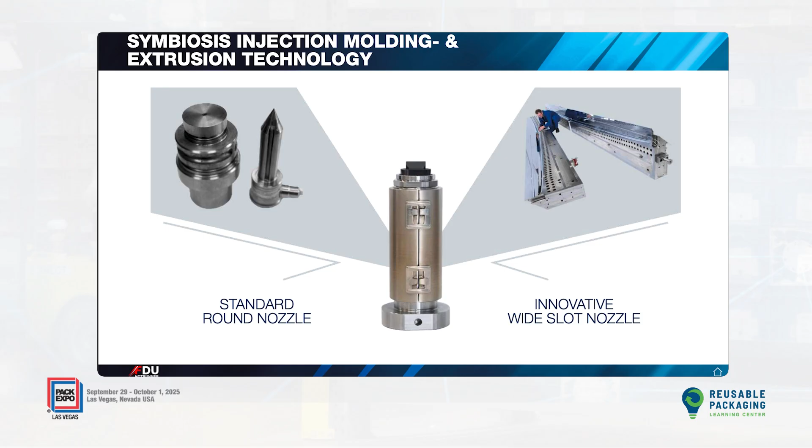Now, what you see here is a nozzle. The nozzle on the left-hand side is what it used to be. Here on this side, you see what we call extrusion. Extrusion is a different method of injection, which means it's how we make pipes or plastic bags. It's a non-stop plastic passing, like how you make a pipe or a hose.

With that die, we came up with the idea: instead of doing the film, why don't we do it for injection molding? And that's how we came up with the FDU, which is the nozzle you see in the middle. And that's what we're going to talk about.

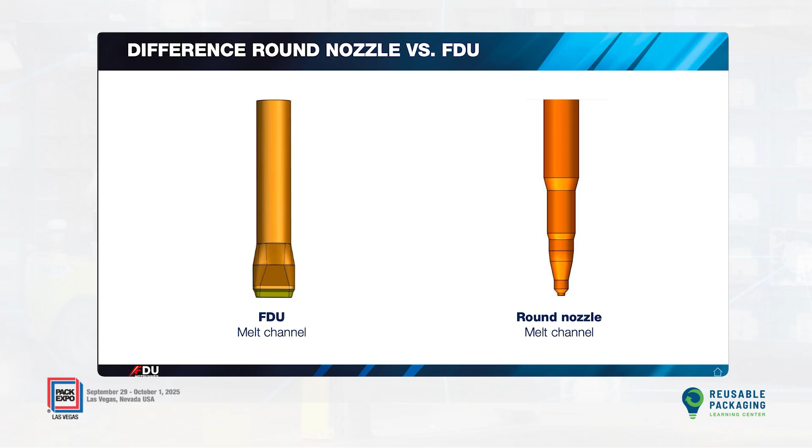As you can see here, on the right-hand side that's a round nozzle, a conventional nozzle, and on the left-hand side you see the FDU, which is the flat nozzle. So it's bigger, it's wider, and it's flat. That's why we call it flat die unit.

This is a video that will tell you about the benefits of the FDU.

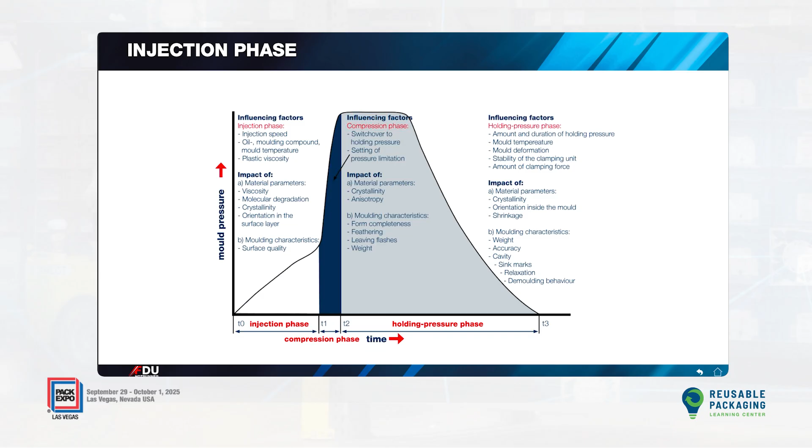During the injection cycle of any part, we have essentially two major parts: the injection and the hold. Meaning we have to put the material into the cavity as fast as we can in a safe way that we don't develop any defects. And also the holding part, which is going to hold that material inside the cavity before the gates freeze, meaning we have to pack that plastic in there. So we're going to talk about the injection phase.

Here we see the differences between the two different hot runners: one that is round conventional and one that is flat. On the right-hand side you see the round nozzle, the conventional nozzle. On the other side you see the flat nozzle, and you see the pin inside, and then the gate. Our pin is flat, so there's more passage of material.

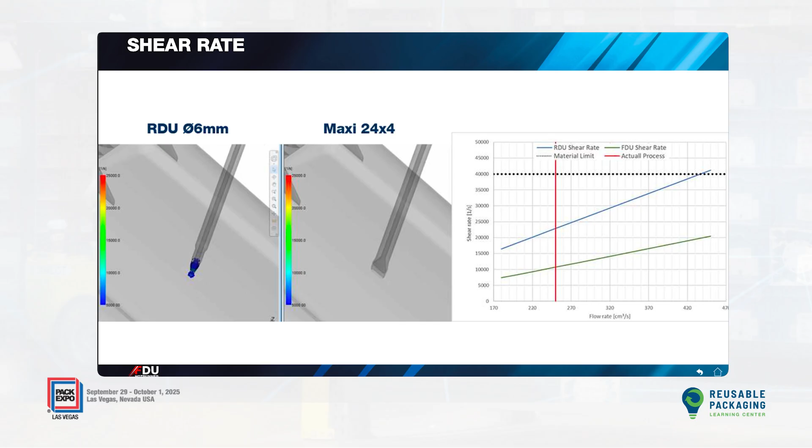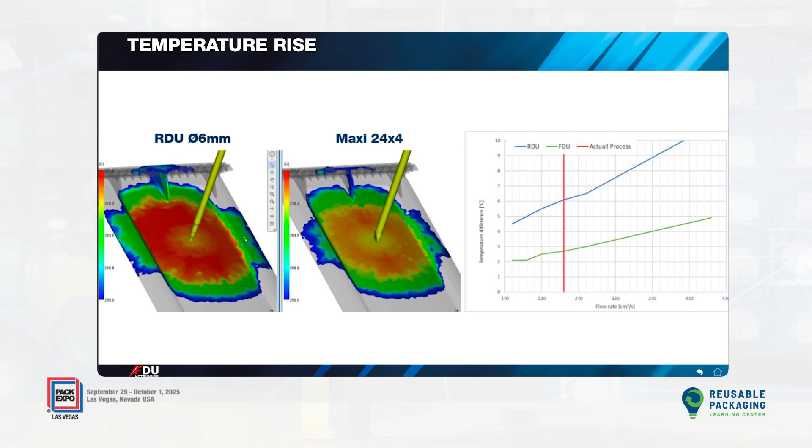Now talking about temperature: on the left-hand side is RDU, meaning round die unit. You see the red, that's the heat created because of the shear, meaning there is an obstruction of material because the gate is small and round. The other one is flat and bigger, so there is less temperature. That's exactly how we come up with higher flow, higher speed, less pressure on the nozzle, but more injection into the cavity. So we're able to not only reduce the cycle time, but also reduce the overall injection time.

This is how they look, the injection phase for the FDU. There is less cooling on the walls as the part is injected with the FDU. On the round nozzle, the plastic starts to cool faster as it enters the cavity, and that creates more issues with defects during the injection.

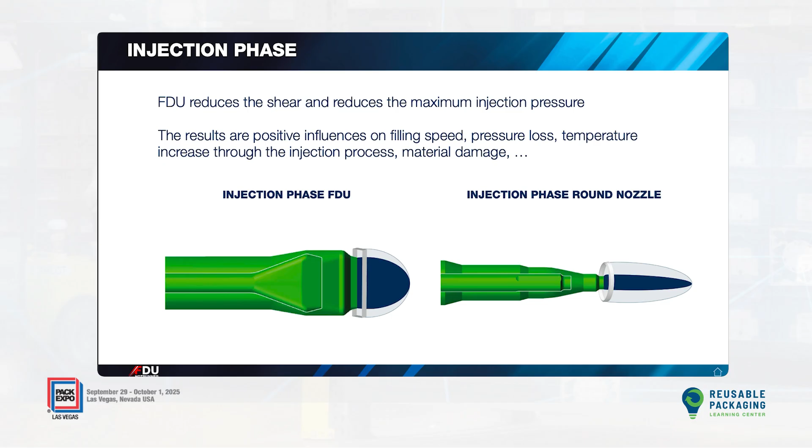Now we're going to talk about the holding. The holding pressure is the highest pressure during the cycle, meaning at the point where you reach that peak and then you go into hold. Since there is less pressure during the passage of material through the gate, you need less tonnage or clamping force. Sometimes you're able to cut the tonnage on a machine using our nozzles by 200 to 300 tons, just for that reason. So there's more savings.

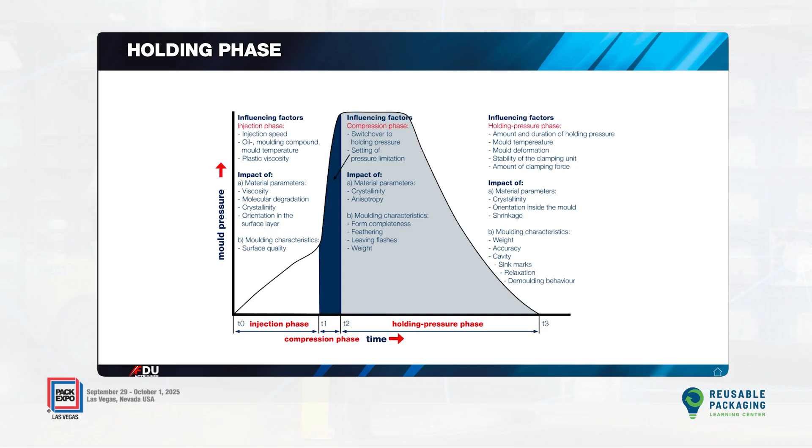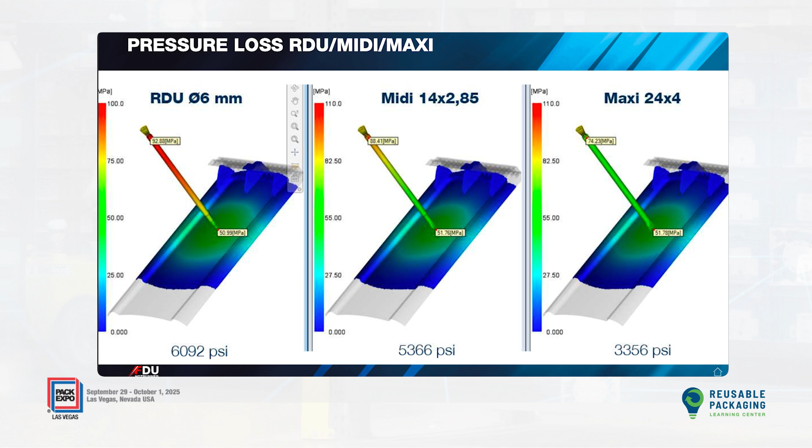Here we're going to talk about the cross-section of the nozzle, and this is very important because of the loss of pressure which occurs at the nozzle. For a round nozzle, you lose about 6,092 psi in this gate we're sampling. We have two sizes in the FDU: the MIDI and the Maxi. The Maxi is, of course, a larger nozzle. On the MIDI, we lose 5,366 psi, which is less than on a round nozzle. But if you use the Maxi, you're going to be losing even less, 3,356 psi. The convenient thing about using the FDU is that there is less loss of pressure than with a round conventional nozzle.

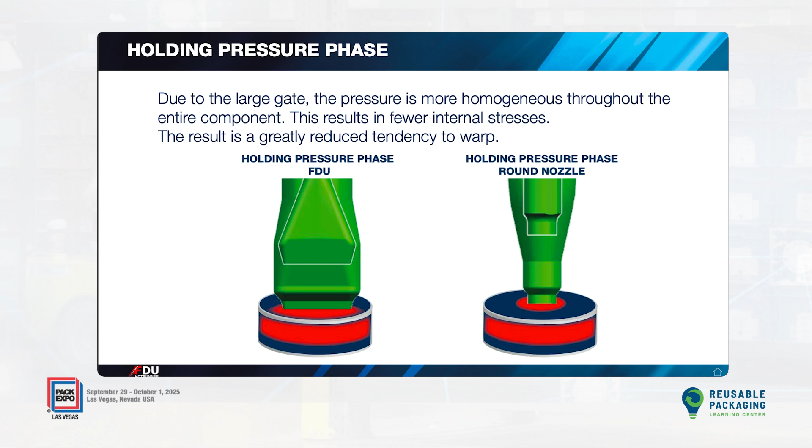Now, during the holding pressure, the material remains hotter. As you can see, on the round nozzle the material remains colder as it enters the cavity, while on the FDU it remains hotter. That allows you more precision and more control of the cavity as it is filled.

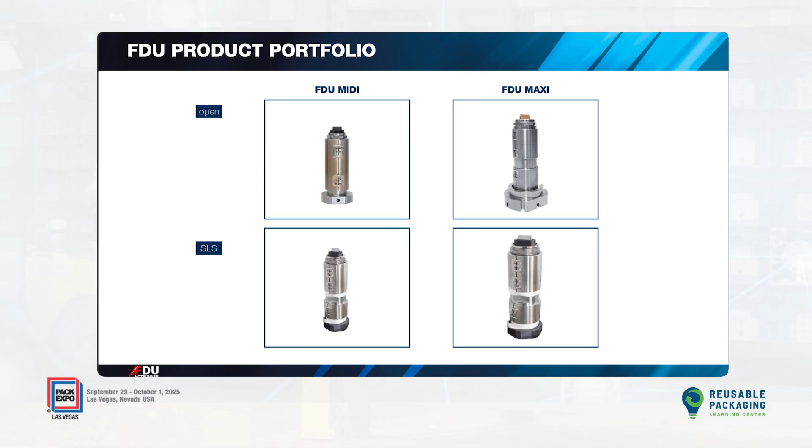Now, these are the products that we have: open nozzles and closed nozzles. What we mean by an open nozzle is that the nozzle is always open. But with what we call the SLS, that is the valve gate, meaning we're going to inject, then close the gate—the pin is going to close the gate—so we can start filling the screw back again. This is very important because it also provides some savings as far as the cycle time is concerned.

Our two nozzles that we have—and this is also very important—the actual melt channel on the smaller one is 16 millimeters, and on the larger one is 24 millimeters.

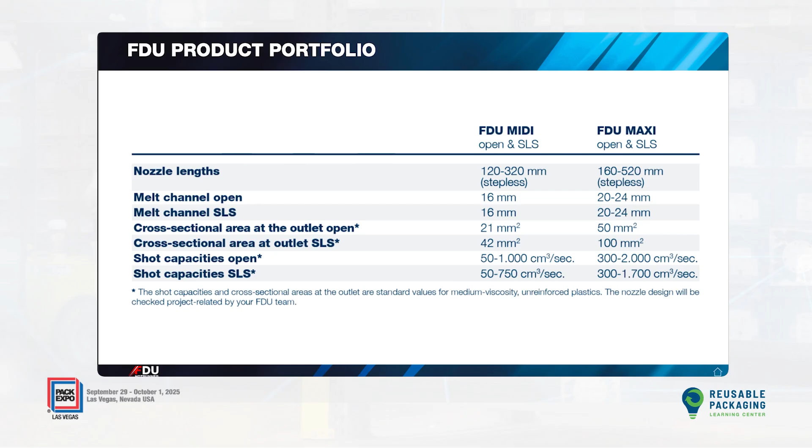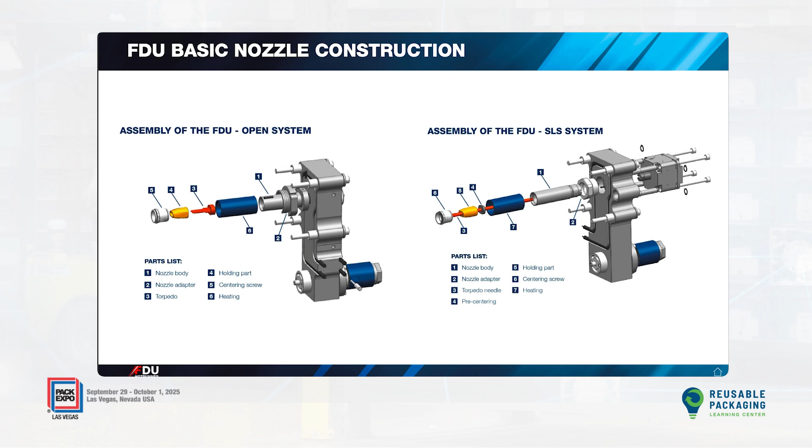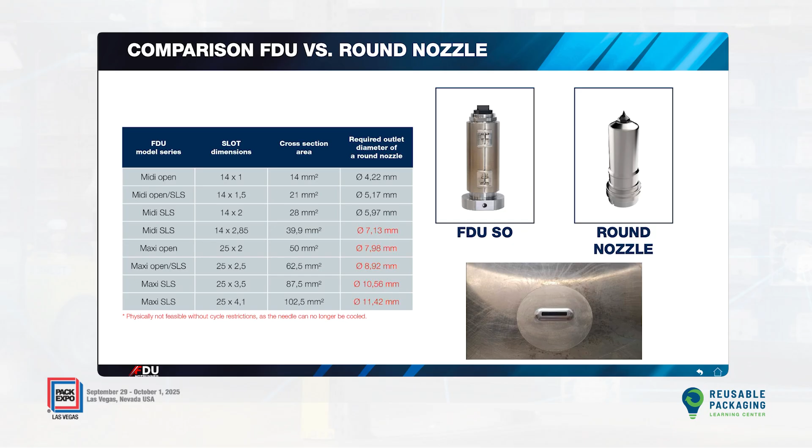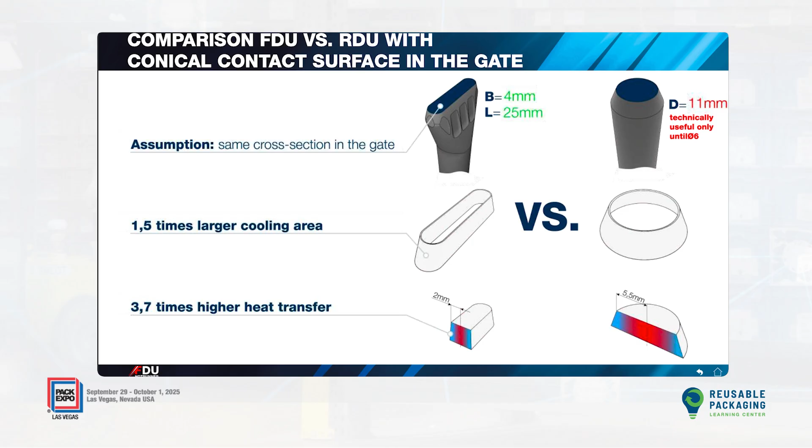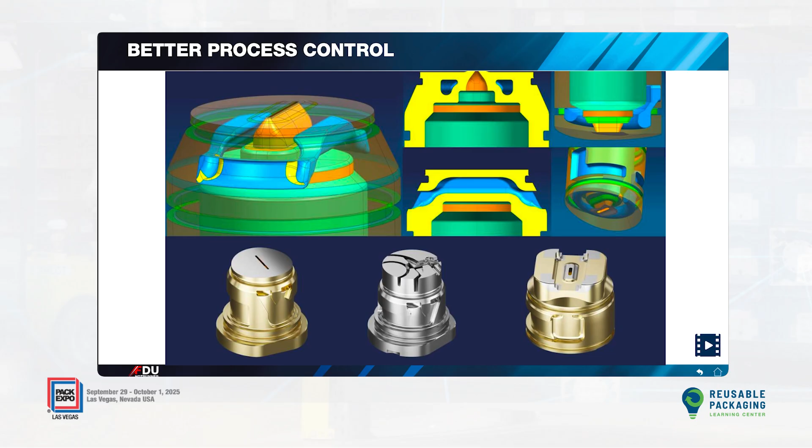And what this does is, if you touch it, it's cold already. It's steel, copper, and brass. So this allows you to have more control over the cooling. At the same time, it creates more longevity as well. And this is what we use for the nozzle, and we also use this technology for all our inserts and parts of the tools. That is called laser tech. We have a machine that provides the powder, and it's a laser welded part. Once the laser welds all the materials, the same machine does all the cutting after that.

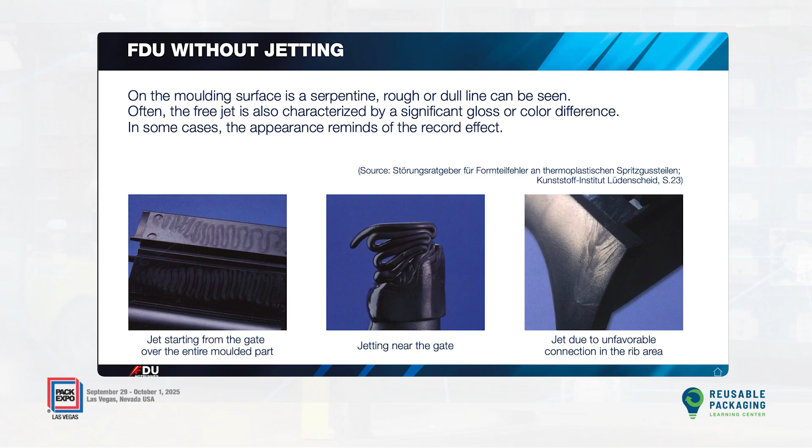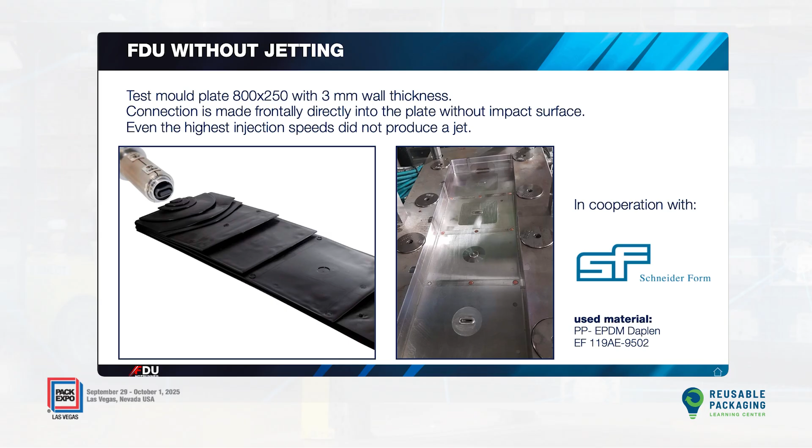During the injection, if you're injecting fast, there is a small defect that we call jetting. We don't have jetting because our gate is bigger. And if it's bigger, there's more material passing through it. This is a flow analysis that we did. We performed this flow analysis to make sure that there was no jetting, and in fact, there was no jetting, so there are fewer molding defects during the process of injection.

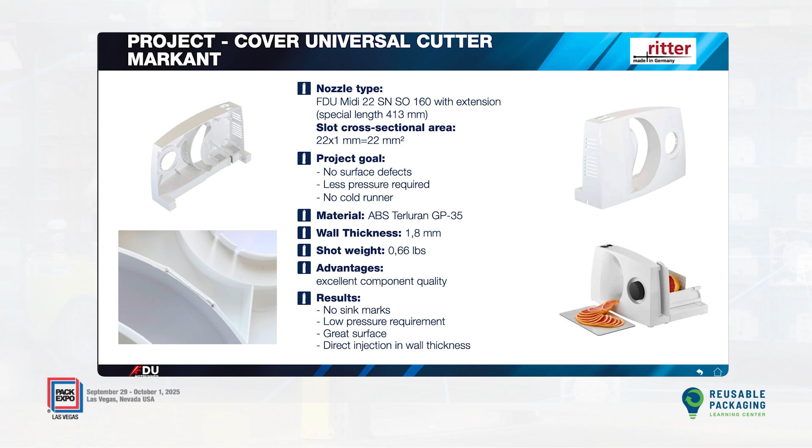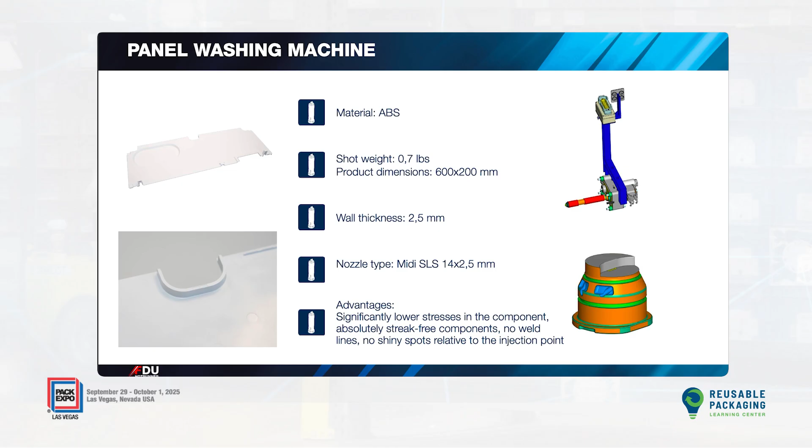Next, these are just some samples of some parts that we have worked on using the FDU. So right here, with the FDU, the injection is happening right on the gate. So I gotta get down to show you. So what this does, the injection gate is on the rib. Instead of round, you can hide it in there. It creates better processing conditions. Here, the gate is on this side; again, it's going to provide less stress and fewer hot points.

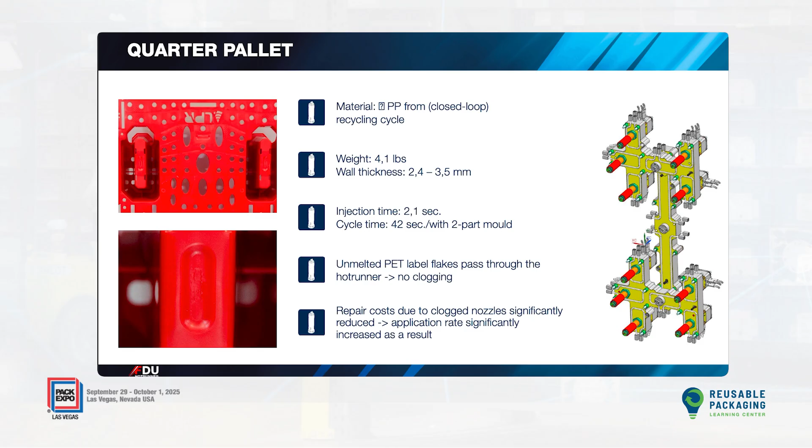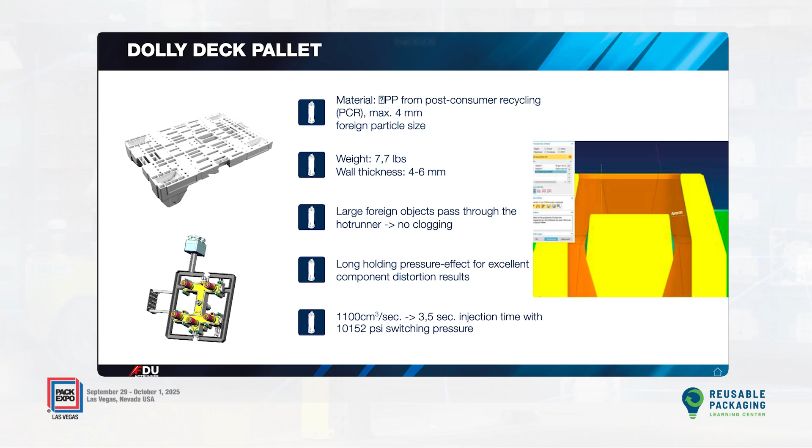For those manufacturers of skids or pallets, the gate is bigger, so you can use PCR, regrind, material that has been processed again and again to save money. The gate provides that ability to have more flow. Right here, one of the things that we see again is a gate using PCR, which is a material that has already been processed. It is heavily used for that reason, to allow more material to go through the gate.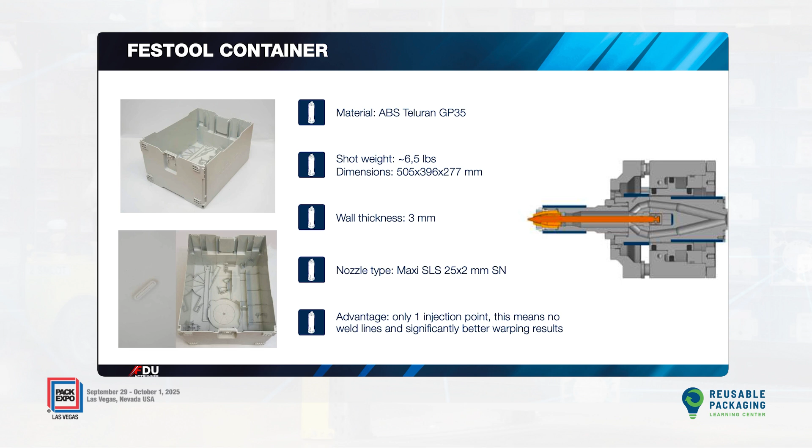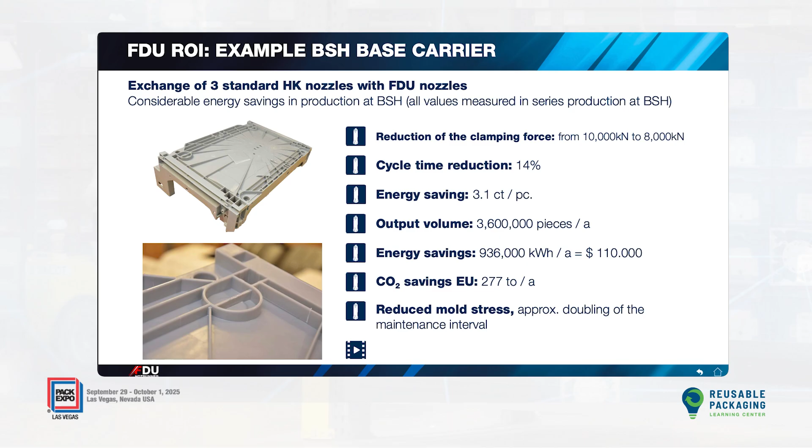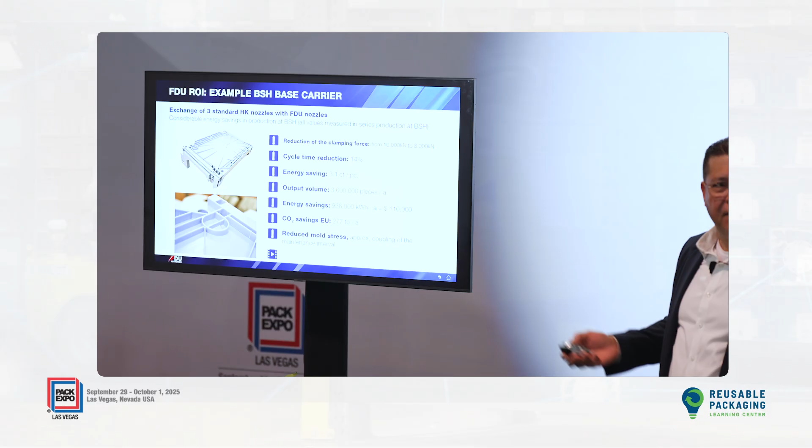This one has a video that I wanted to show you really quickly. This video was done not by HAIDLMAIR but by our customers, and it shows the significant benefits of using the FDU hot runner over a conventional nozzle. So we cool faster, we inject faster, and we have better control over the processing capabilities. So we're going to click. So this customer created this video to show their customers. This part is for a washing machine.